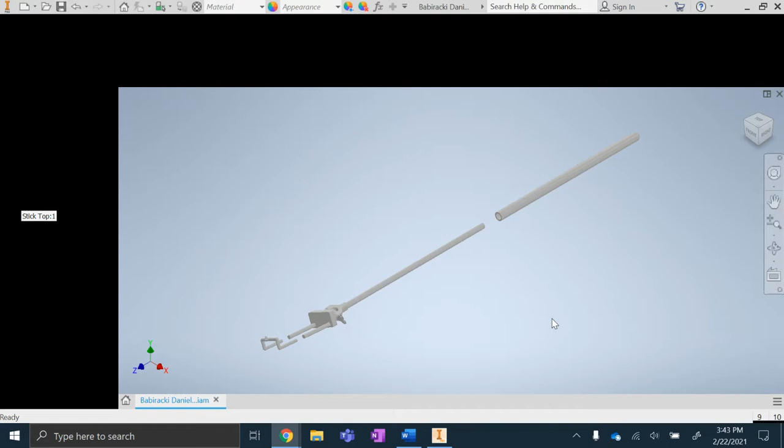In this video, we're going to add a few more constraints to the selfie stick to make it a little bit more lifelike. Currently, we have 3 problems.

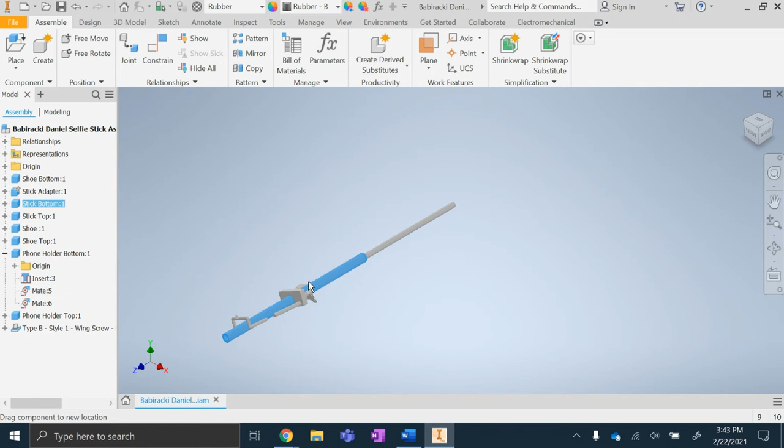Starting at the back, the stick bottom - see how that highlights as soon as I click on it? It slides off of the selfie stick, and also slides straight through the rest of it. That's not great. The other problem is the phone holder top - click on it, that highlights. Our phone holder top slides in and goes way too far, and also slides off.

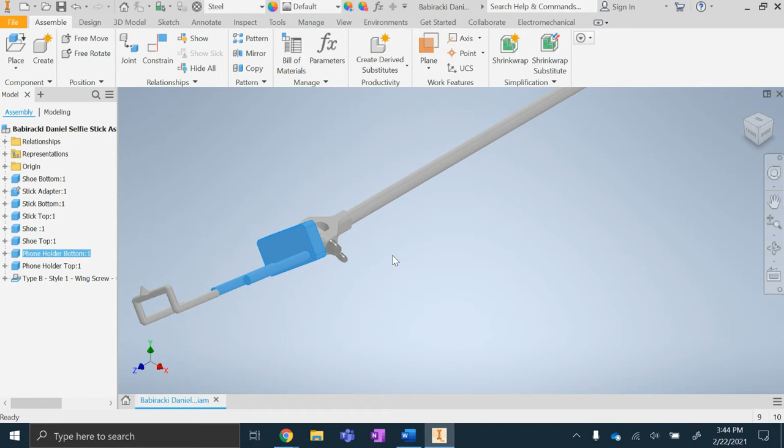That's a problem. Our last problem is the phone holder bottom, as well as a couple other pieces such as the shoe top and the shoe bottom. They twist and spin all the way around, and we don't want that either. That does not obey the laws of physics whatsoever.

So let's go ahead and fix it. I'm going to go ahead and zoom in here.

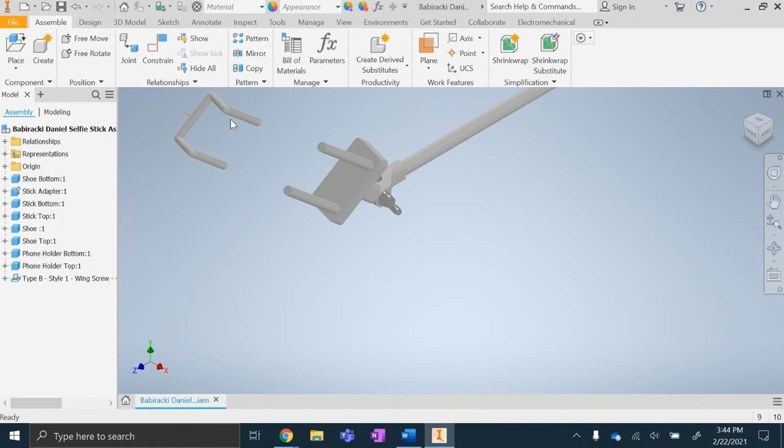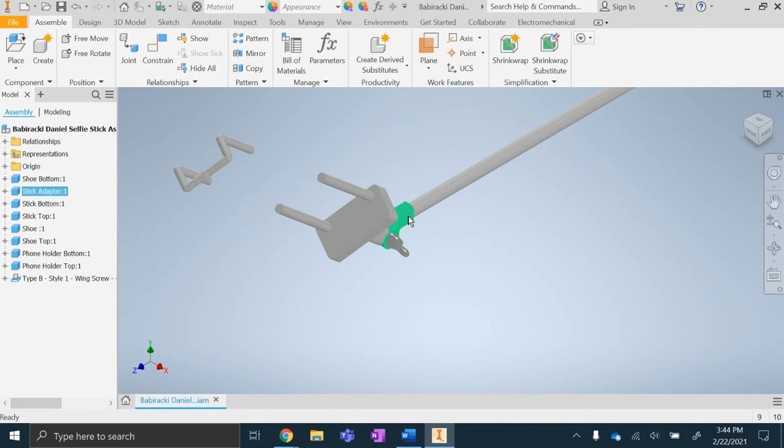Let's start out by taking the stick adapter, and if you have not done so already, make sure you hit ground. Ground your stick adapter, making sure it stays in place, otherwise things are not going to work very well. To ground it, just right-click and hit ground. I ungrounded it just then, and the whole thing moves - not what we want. Again, go ahead and ground it. Right-click, and ground that piece right there, that stick adapter. And now it doesn't move.

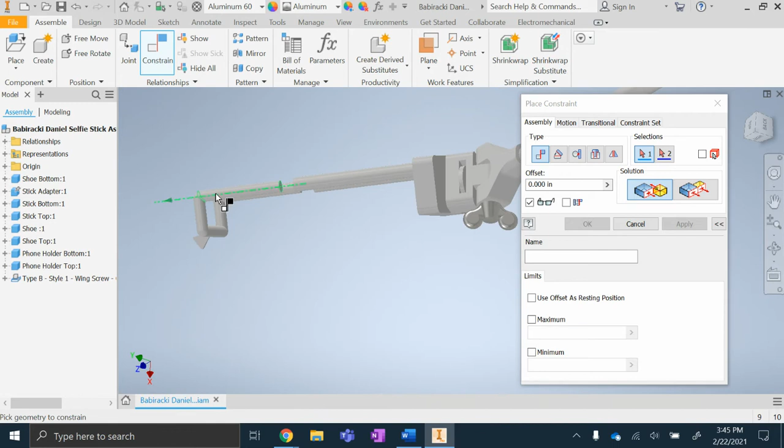Perfect. Let's move on to the phone holder top. What we're going to do is hit constrain, and we are going to constrain the bottom of this piece right here - zoom in - and mate it with the bottom of this piece right here.

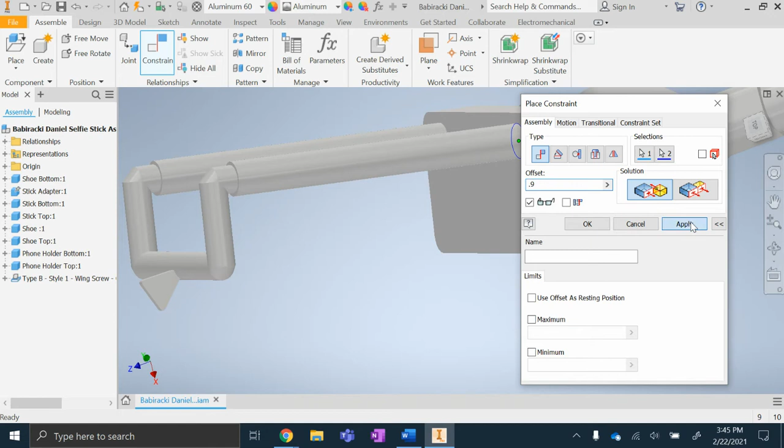Now it is going to slide in just a little bit too much. That's okay. Let's offset it, and we're going to give an offset of 0.9 - not comma 9, 0.9 - and hit apply. Perfect.

Now we do have one problem with this. When we click and drag, it's just stuck - it doesn't slide in and out anymore. We do want it to slide in and out though. So what we can do is come over here to phone holder top, click that plus button right next to it, and there's our mate with a 0.9 inch offset. Let's go ahead and right click and edit.

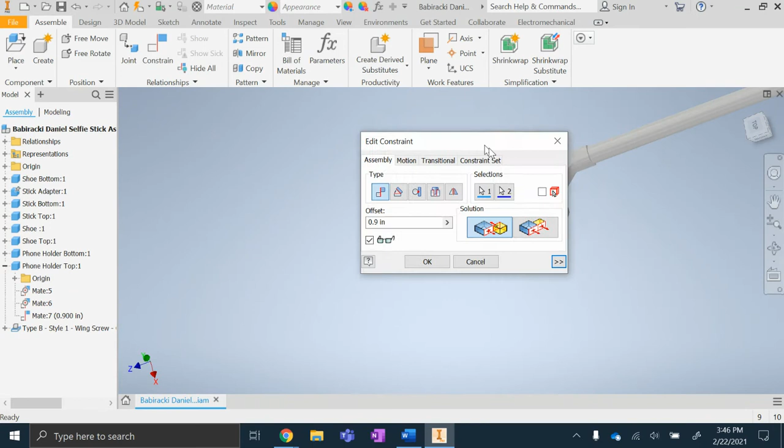Let me move this over here. This little button right here looks like a couple arrows - we're going to click on that to bring up more options. First off, we're going to give it a maximum distance, and this way we can play around with it. What is the maximum amount we want it to be able to stretch out?

Let's just say 2 inches, and the minimum is already at 0.9. Let's hit OK, and watch what happens. Now we can pull it out, we can push it in, but it can't go any less or any more than that. Look at that one more time.

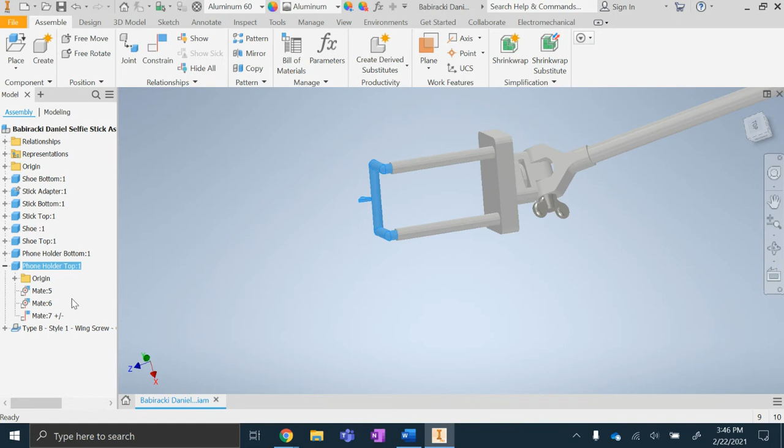Look at this now - the mate has a plus or a minus on it, which is super nice because we're allowed to go a little bit more or a little bit less. Let's go ahead and edit. So from this maximum, we're allowed to go this way 2 inches, but no more to the right.

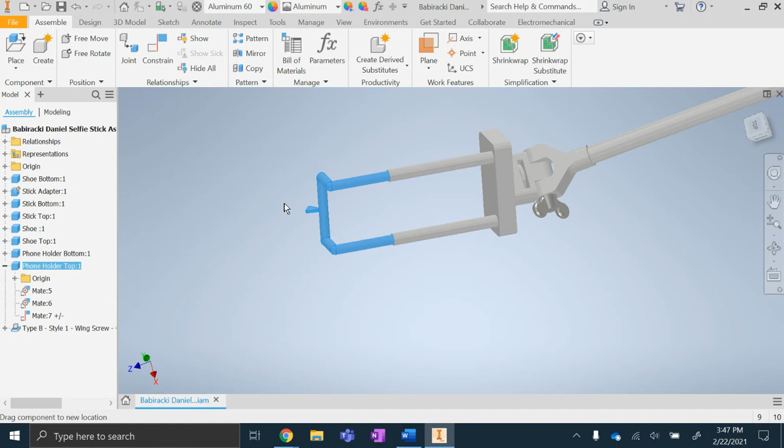That's super nice. Another option you can select, and I'm actually going to have you select, is use offset as the resting position. Hit OK. Now it's spring-loaded - it will bounce back to its original position every single time, which makes sense because this would have a spring in it in real life, so that it can hold your phone.

Next thing we have to fix.

Oops, turn around this way. This guy spins around 360, and we do not want that.

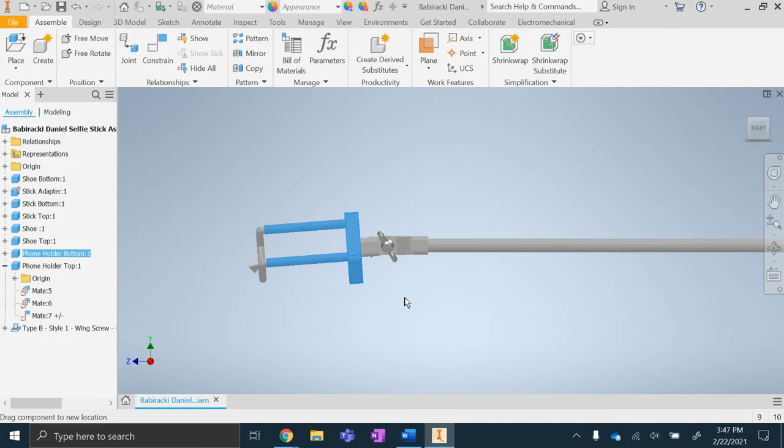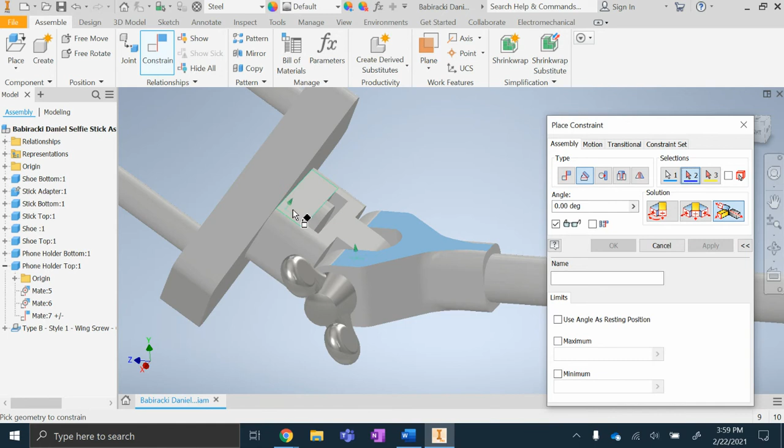Let's go ahead and hit constrain one more time, and we are going to use the angle tool. Click that button right here, and it brings up the angle measurements. Drag that over here, let's get a good look at the top. We're going to click here on this flat area and here, then hit undirected angles.

The default is 0 degrees, which is perfect. 0 degrees is just flat, which we do want as our default.

Let's go ahead and add some limits here. Our maximum will be 90 degrees. Because it is an undirected angle, we can just leave the maximum at 90 degrees. We don't need to add a minimum, so I'm going to uncheck... oops, yes we do need to leave that checked. We'll leave maximum at 90 degrees, and the minimum we'll just leave at 0 degrees.

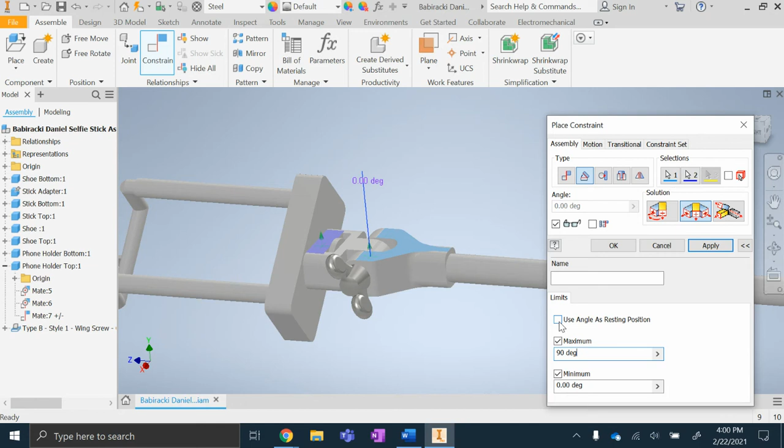Now, this in real life would not be spring-loaded. We don't really want it to snap right back into place. However, if you do want it to snap back into place, you just click this button right here. I'm going to leave it off though. Because I left that off, now when I turn it, it still stays, but my limit is 90 degrees, looking good. My other limit is 0 degrees, looking good.

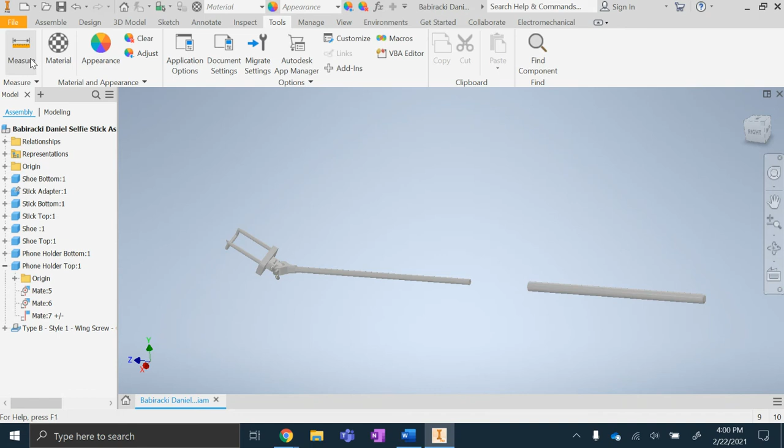Last one that we're going to do, we have the bottom of the stick. I'm going to go ahead and constrain. Oops, let's go ahead and measure that first, actually. Let's go to Tools, Measure. I'm just going to measure the length of the bottom of this stick from end, click, click, and it comes out, let's call it 12 inches.

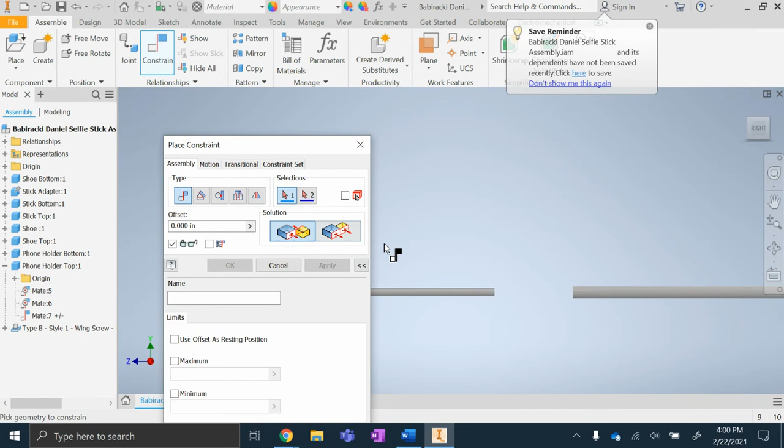So I'm going to go ahead and assemble, constrain. We are going to mate the bottom of this stick to this end of the other stick. We'll slide all the way in. That's great, just double check, make sure it's not poking out the back. Nope, we're good, looking good.

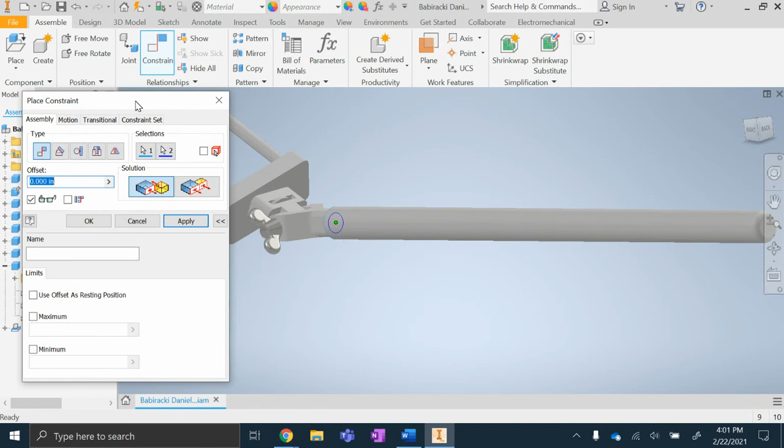Now all we want to do is add a limit. So we're going to give it a maximum of 12 inches, that's the measurement we took. So now it can slide outwards 12 inches maximum. If you want it spring-loaded to go back to the original position after you let go, check this box, but I don't want that, I'm going to leave it unchecked. Hit apply.

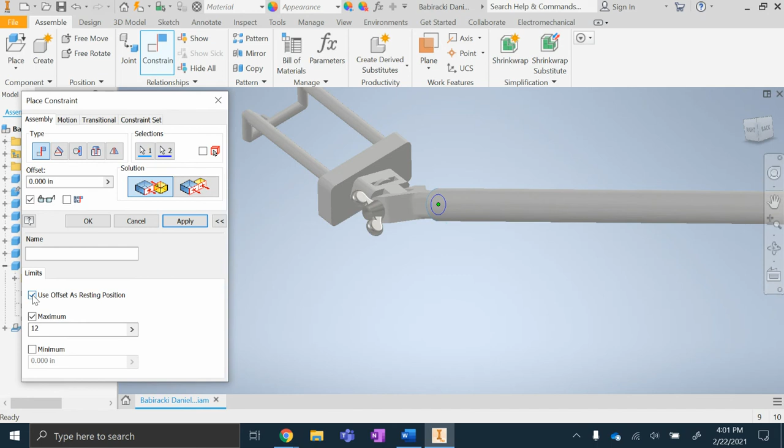Okay, let's test it out. Zoom out a little bit and click and drag. Look at that, and it does not leave. And it... oops, look at that, it goes that way though.

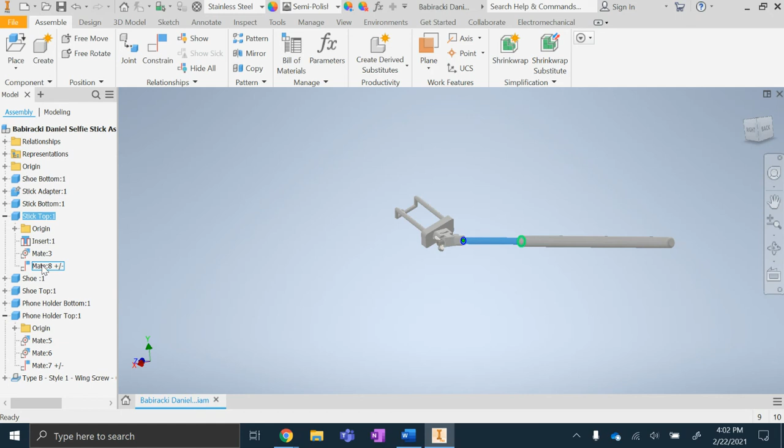Let's go back and edit that. So this was the stick top, plus button, there's that mate that we did, plus or minus meaning it can be moved a little bit. Right click, edit, and there it is.

We forgot to add a minimum. Add a minimum of 0, hit OK, and now it shouldn't go. There we go, now it stops. Stops here, it stops there. Life is good.

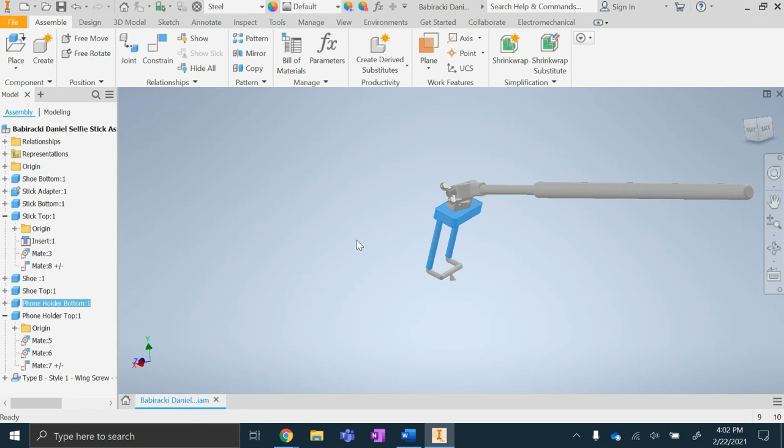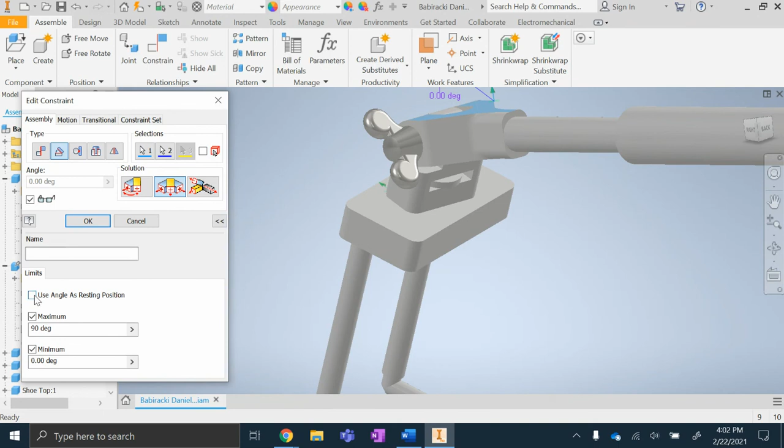Again, if you do want any of these spring loaders to snap back to the original position, you can just go back. Let's go ahead and do it for this guy really quick. Shoe bottom... no, it wasn't the shoe bottom, it was the stick adapter. There it is, angle plus or minus. Right click, edit, and enable use angle as resting position. Hit OK, and now it'll snap right back.

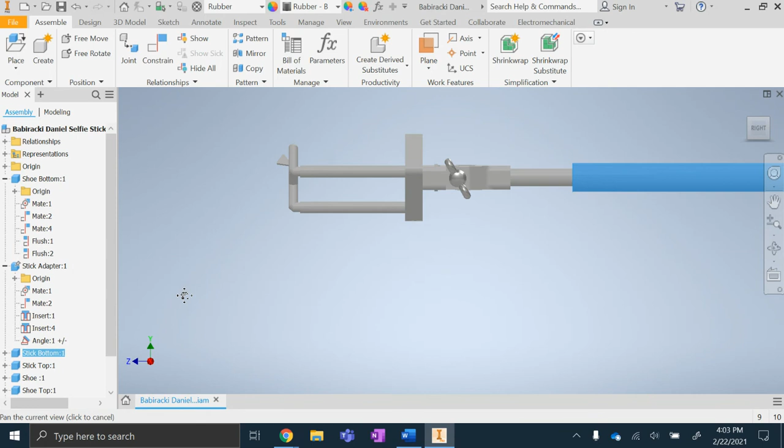Look at that right side, I can click and drag this, it'll bend, and it'll go right back. If I wanted to do it with this guy right here, go to stick bottom, there's that mate that we just did. I'm going to right click and edit and use offset as the resting position. Hit OK, and there we go.

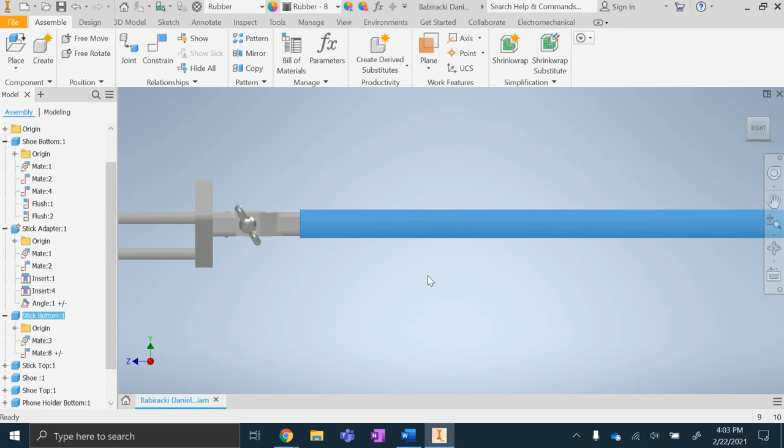It'll spring right back, but again, personally I don't want that because in real life those wouldn't be spring loaded. So I just hit undo twice, oops, hit undo a couple more times. Come on, undo, undo, there we go, that's fixed. Do a couple more times here, there we go, and this is fixed. Double check, make sure everything's good, and perfect.